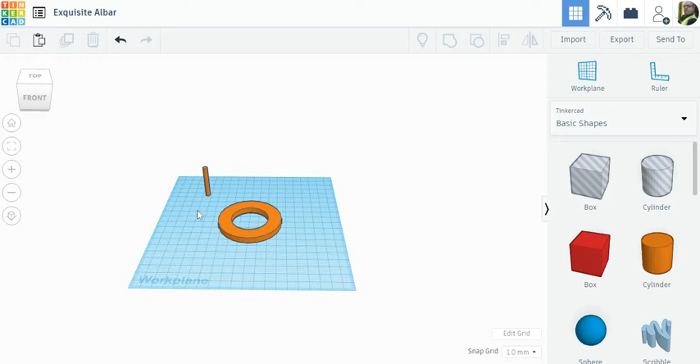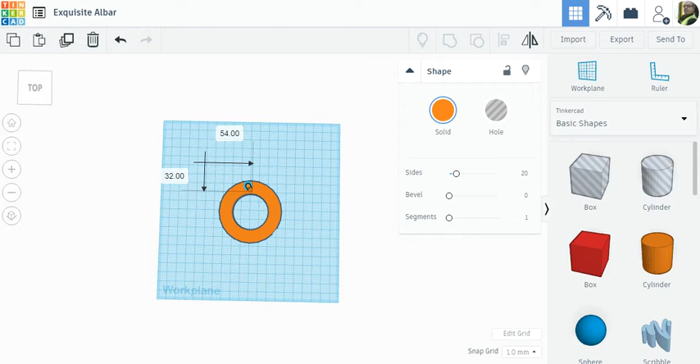So I basically want to create a hole right at the top, for reasons which will become clear. I'm actually starting off with this rod that I've made that will be the diameter of the hole I want. It doesn't matter where I place this - you could place it around here, or down there. It doesn't matter where I'm starting because I'm going to rotate the entire ring 2 lots of 120 degrees, which gives us 360, thus giving us the 3 equidistant pins.

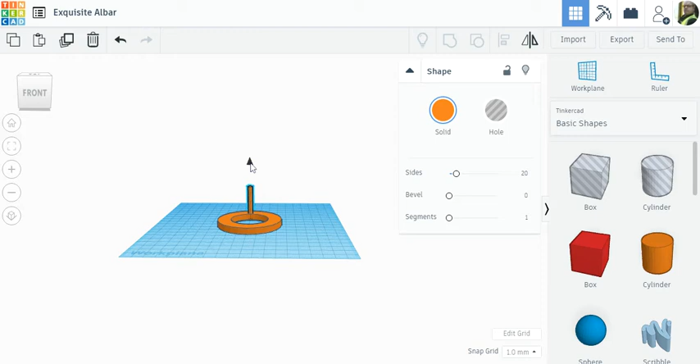I'm going to rotate this around so you can see it. Now this is important, watch this. Only that item pin is selected, and I've got that triangle that turns red. What I'm going to do is lift it up - put it on the workpiece where I want it, the exact distance, and lift it out of the workpiece.

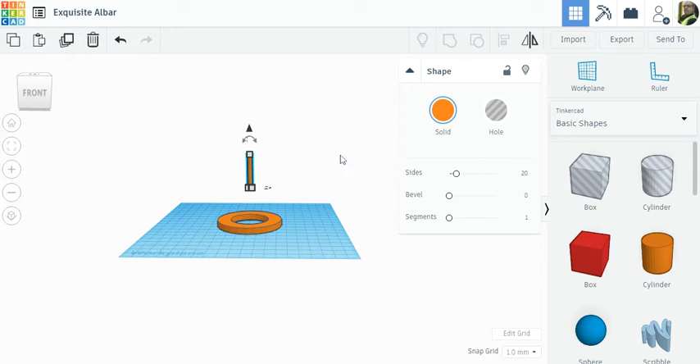There's a very good reason for this. You may not know unless you try and play around and mess it all up. This is the only way it seems to work for me. So I've lifted out the workpiece. Now what I'm going to do is make sure I can select the two of them together - you can see that little blue tinge on both of them - and I can actually link them together.

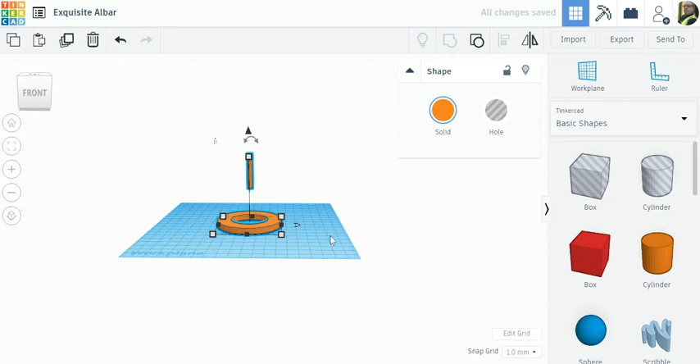I'm going to click away, because if I click on anything while all those points are showing up, it'll just move the dimensions and not the actual part. So you see I can move it around now - that part is linked. For a better view, I'm going to right click and rotate it down so it's almost on top of it, but not quite. It's personal preference, it's just what way I want to see it.

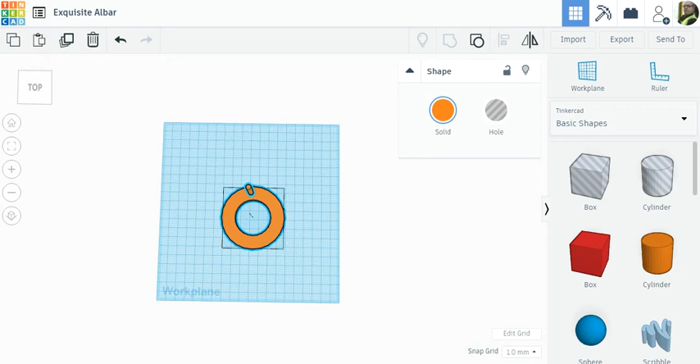Now I'm going to click away and make sure - I've got it all selected now, that and that. The first thing I'm going to do is duplicate it. You can press Ctrl D or duplicate.

Now basically you've got the two of these items, one identically placed on top of the other. What you're going to do - you've probably got the top one selected. I don't know what the rules are in Tinkercad, but the topmost copy is going to be selected. This probably doesn't matter at this point whether it's the top or the bottom, because there's two of them. So you're going to click on the angle arrows which turn red here, click on it and bring your mouse down to this little box.

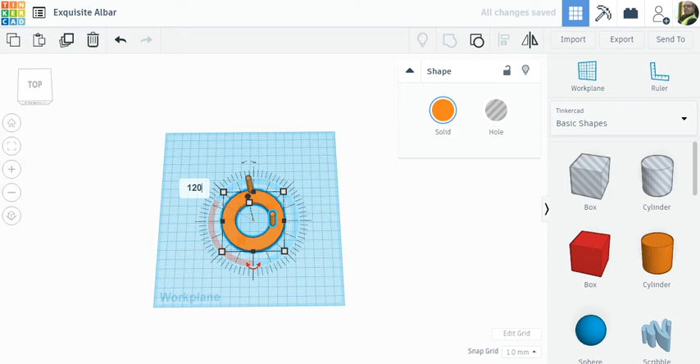Now you see it's turned red. You can click on it and type in 120 - and I just dropped my mouse. Mouse recovered. Okay, 120, and I can hit enter. Now, as you can see, it's moved it around.

The perspective looks a bit odd there - it's because they're up in the air. If you see them dead on, you see that it is 120, but it just looks a bit weird being in mid-air.

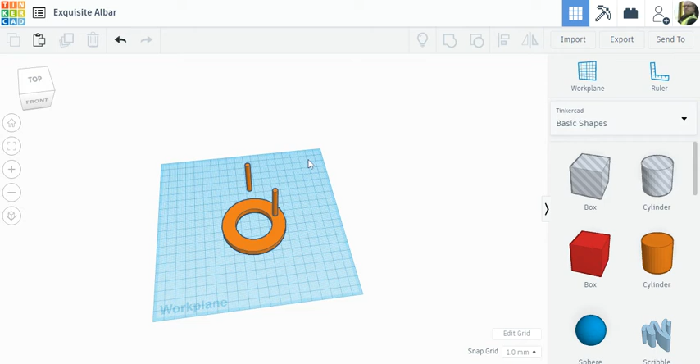Now this is where it gets a bit - this step is important, otherwise it causes problems. Select it all again, over here, and make sure you ungroup it. If you don't ungroup it, when you rotate it around, you might rotate this first one around, and it'll be an exact copy of this one in exactly the same place. And it just messes up Tinkercad.

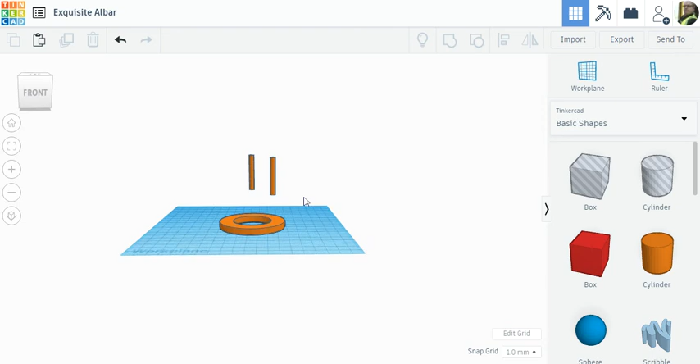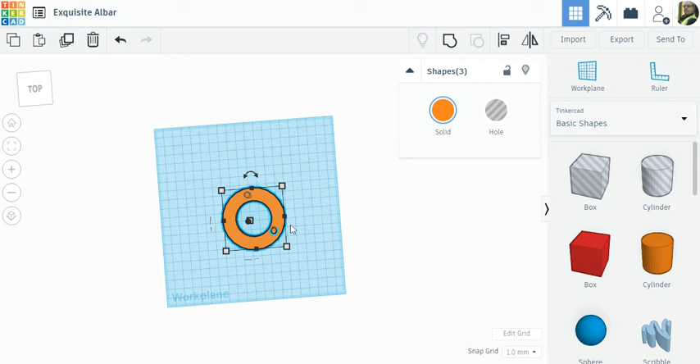You need them all disconnected. The way to prove they're disconnected is to go like this and try and select each one - see, I can select that one, I can select that one. If anything else happened, you've done something wrong and need to go back and make sure that all these three are unselected. Now the next trick is not to select all of them, but only that pin. See, it looked like all three were selected, but it's not - it's showing that and that with a blue haze, and that one hasn't. So the last one's been left hanging in mid-air, technically.

So I'm going to connect those two together - these two now are intimately connected. Now I'm going to duplicate again. But remember, I've duplicated the ring and the second pin, not the first pin. That's been left out for now, because if I'd duplicated that, when I rotate around later, that first pin would end up having two pins in position 2, for want of a better word.

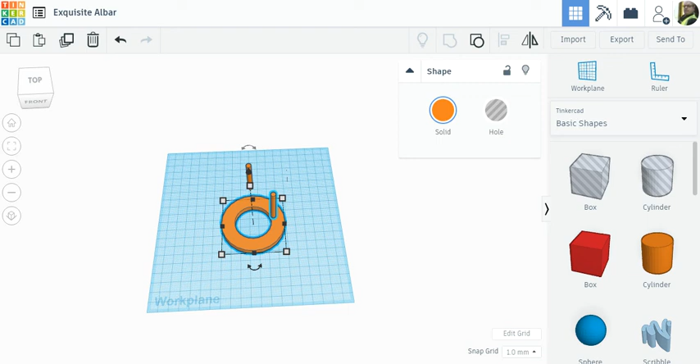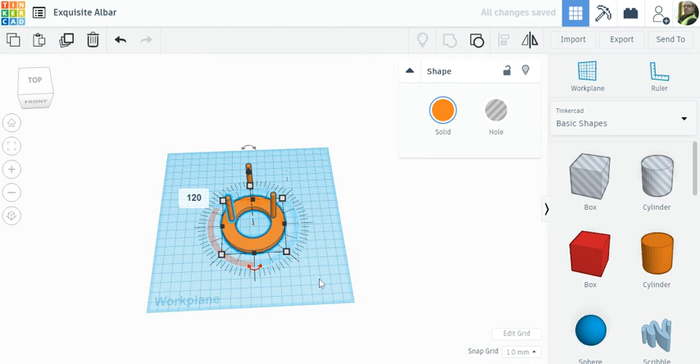Okay, I've duplicated that now. So the one I duplicated I want to rotate around again, 120 degrees again from the position it's at. Almost forgot to hit enter. Almost done now - again, that looks weird because they're floating in midair.

I've just clicked away and I'll show you the angle - see, they're in midair, blah blah blah. There's a reason for this again - it all goes weird if you don't do it, I guess.

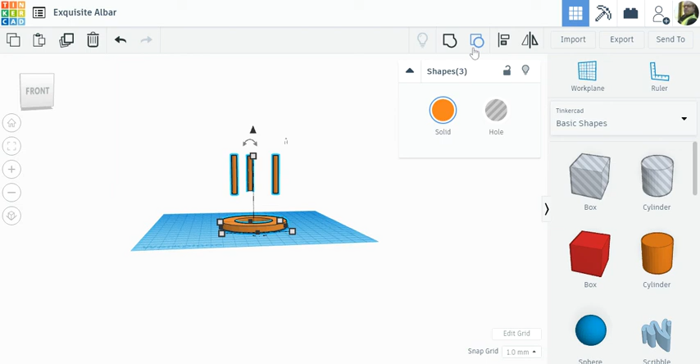Now this is a little shortcut - actually no, I'll take that back. If you select everything and make sure it's all disconnected, click away now, and to double check they're all actually disconnected, click on that one.

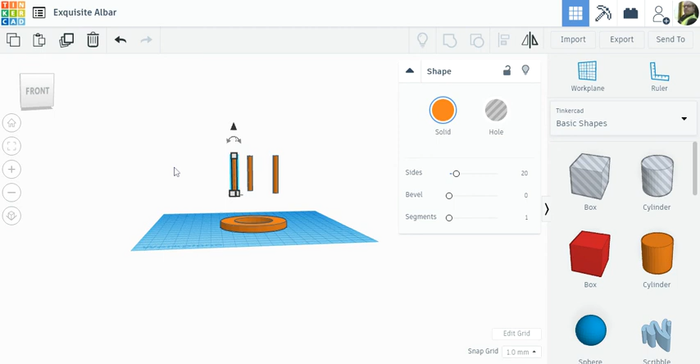You should get an individual - it's not linked to anything else. So again, click on this, it's not linked to anything else. Third time, click on this, it's not linked to anything else. Job done.

Now if I go like this, I've got all three selected, and you can see I can actually move all three. Hopefully you know what's going to happen next - let's see if you can guess. I'm going to turn them into holes.

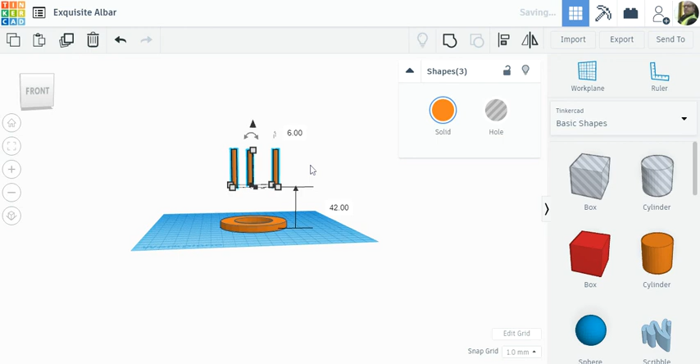I then come over and bring them down into the workplane. Now I go through them, doesn't really matter - you can go to the height thing on the right, put it to 0 if you like, doesn't make a difference. Okay, click away.

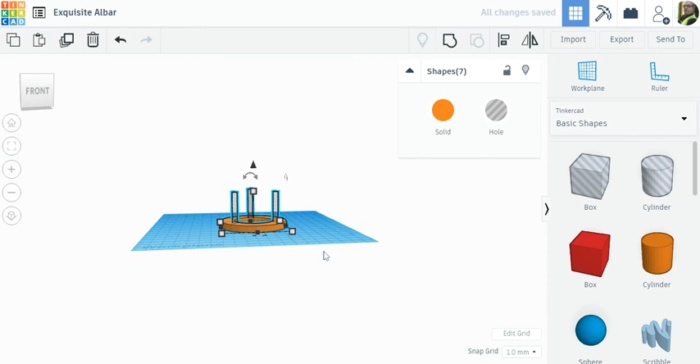Now again, select the whole thing, and this is where you group them all. I'll bring it back here - there you can see your 3 holes. Job done - one flange.